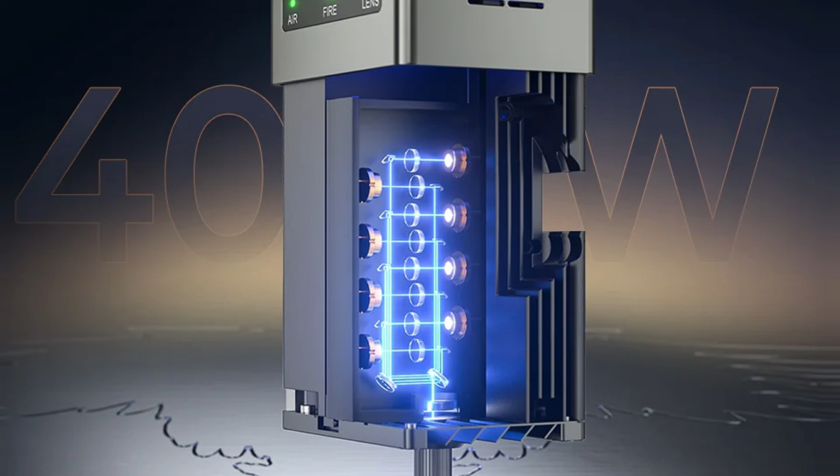I decided it was time to get a CNC laser to make parts, labels and containers for the machined microwave devices that my business sells. The new 40-watt class blue diode lasers were the final push I needed. Then, out of the blue, Creality asked if I'd like to try their rather fabulous Falcon 2.

Talk about serendipity. Right, let's be very clear here. I want a laser that, as a machine tool, does things better than the traditional tools I use. I don't want to run a laser business. There's plenty of other folks out there making amazing stuff.

I want to mark up control panels and cases for electronic and radio systems. I want to apply serial numbers and logos to tiny metal and plastic parts, build support structures to assist with machining and test fixtures, cut holes in engineering plastics that I can't do easily on a machine tool, and make protective wooden boxes for the high value items I sell.

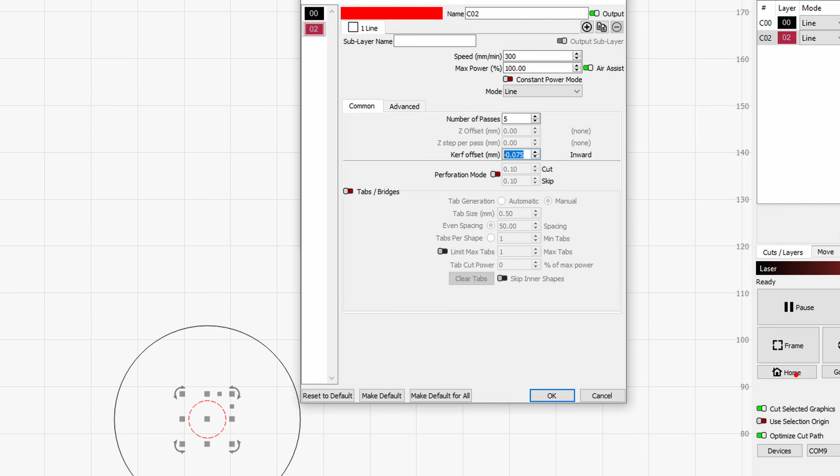The Falcon 2 is small enough to fit on a desk or workbench and light enough to carry in one hand, if you're strong. It can work standalone, but it integrates really well with Lightburn.

As well as the usual cutting and engraving, these blue lasers can develop reactive films on stainless steels to make a range of colours, including the blue that I use in my logo.

This thing combines 8 5.5 watt laser diodes into a single beam. I've managed to slice through some pretty thick boards with it, although using it on 2x4 is a bit silly when I've got a big radial arm saw.

For fine work, you can select a smaller beam that's great for fine engraving and where a cut needs to have minimal width. I'll measure just how fine a cut's possible later in this video.

For me though, making joints is where this laser really shines. I see what you did there.

Setting up the Falcon 2 is really simple. You just take it out of the box, fit the feet in one of the 3 sets of holes so it'll fit on different sized tables, slide on the head and connect the air assist tube to the pump that's supplied with the Falcon 2.

There's plenty of videos about our process, so I'm not going to repeat it here. I'm not going to show you how to make decorations or dog tags or wall art or engravings of your cat, even if it is a lion or a tiger or bear. Oh my. Obviously, I might allow the occasional Chihuahua coaster, but I promise faithfully that I'm not going to encroach on anyone's business by putting hilarious messages on stainless beakers or engraving imperial eagles on glass pool trophies.

I'm interested in how this gorgeous tool can help me make better products. I'm going to push things a bit with some materials way against best practice, but I like to know where the limits are. The most spiffy thing I want to try first is colour engraving on stainless steel. I'll try titanium alloys in a future video.

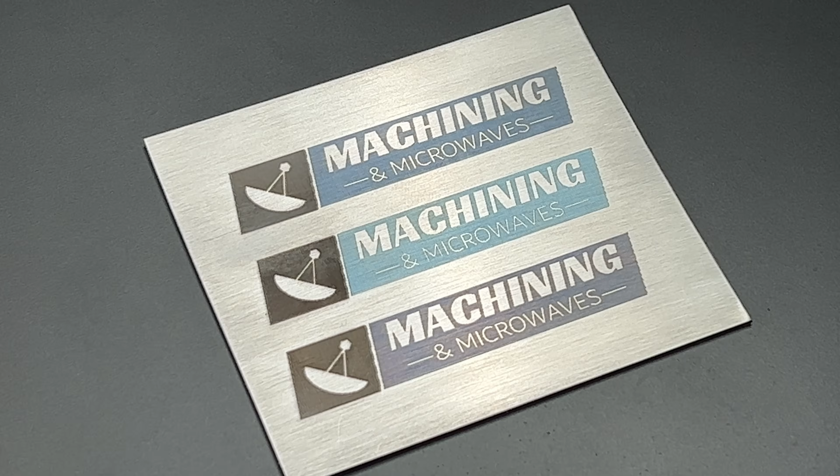This is my first attempt with a range of speeds and power levels generating black, 2 dark greys and 3 different blues. There's a lot wrong with it because I didn't use the right tools to make the source image and I've got no idea what I'm doing.

Not that that's ever held me back. It's almost my slogan. Under a microscope, there's some definite scan lines in the blues and the slant lines are terrible because they're a raster image instead of a vector. But from a distance, they look very nice.

I need to try different step over distances and some different dithering methods, but for a first attempt, I'm not going to beat myself up too much. I mean, Amy wouldn't be impressed. That's mildly acceptable if you screw your eyes up and look at it from far away. Ideally, from very far away.

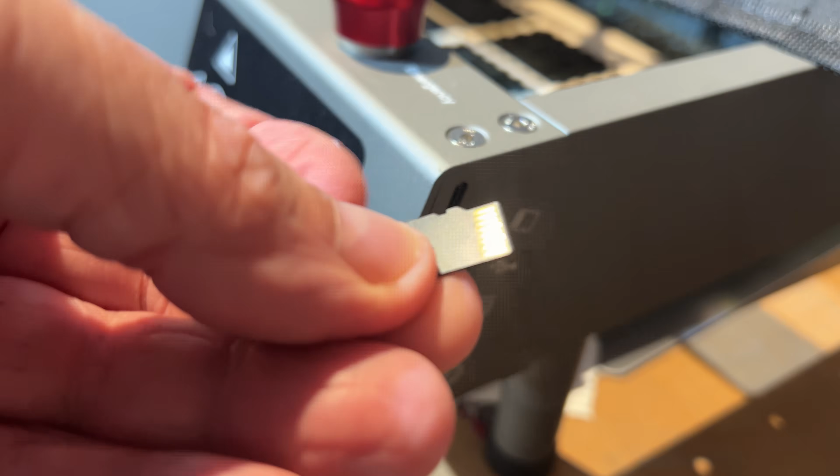So, what did I need to do to get the Creality machine to do its magic? You can simply unplug the microSD card from the Falcon 2 and copy a generated G-code file from a computer and then plug it back into the Creality. When you press the button, it finds the most recent file in the root folder of the card and prints that. I'm a nerd and I wanted to do things a little more technically.

So I decided to connect the Falcon 2 to the computer at the opposite end of the study. That's a problem because of the 3 metre limit of USB cables, but I found a 5 metre USB-A to USB-C lead with inbuilt range boosters. Links in the description. You can probably use 2 of these with a powered hub in the middle, but that needs additional nerding.

Wi-Fi connectivity would be neat, but might encourage folks to leave the laser unattended with the associated fire risks. The Falcon 2's got excellent protective systems to detect problems with the air assist, fire detection and lens fouling, but leaving a CNC laser running unattended without a room fire suppression system is a little outside of my risk appetite.

I wanted to site the laser near an opening window and well away from where I sit in the study, so I could have the Falcon 2 running with my back to it at least 4 metres away for eye protection and lung protection when I'm cutting smoky and smelly stuff.

It's important to say that the basic machine doesn't include some of the quite useful accessories I've got. The separately purchased honeycomb support plates are really useful for felt, leather and other floppy materials, and also when I'm using some sort of cutting template. For stiff material though, I prefer building support pillars with disc magnets for the material to rest on, and then another 2mm thick disc magnet on top to grip the workpiece.

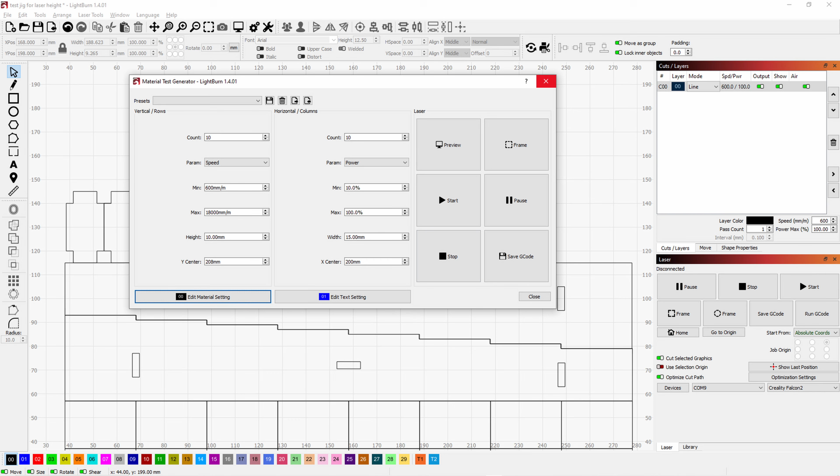One of the vital steps about using a laser for cutting or engraving is test grids. The speed and power of the beam need to be balanced so you can get a nice clean cut in a reasonable time. So I tried some cuts and fills at a range of speeds and powers. I'll be keeping them in a file for reference for each type of material. This one shows me how 3mm plywood behaves.

Based on the test grid, I chose 800mm per minute at 90% power as a reasonable value for cutting. I ran some 20mm square cuts and a 24mm round cut using zero kerf in the LightBurn settings to see how accurate the laser was in the X and Y directions when I wanted to make a cut with a very precise inside or outside dimension.

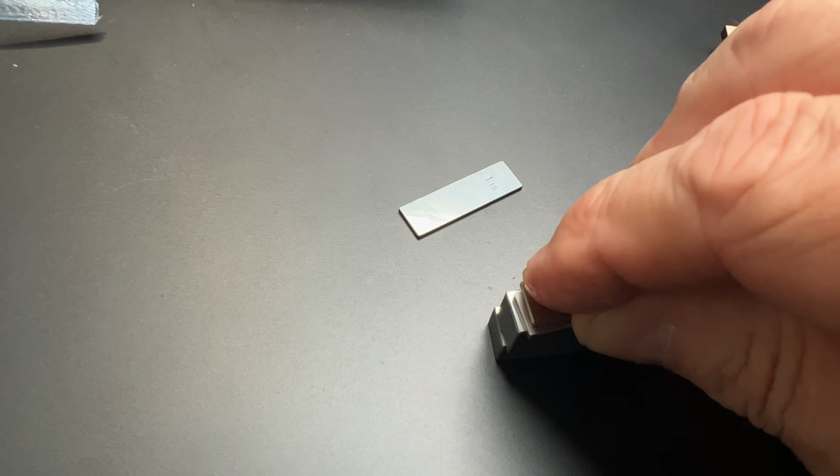I used a stack of gauge blocks to measure the X and Y dimensions of the square holes, and then used a 3-point bore micrometer to measure the 24mm round hole. I used the measured dimension so I could set the right kerf offset.

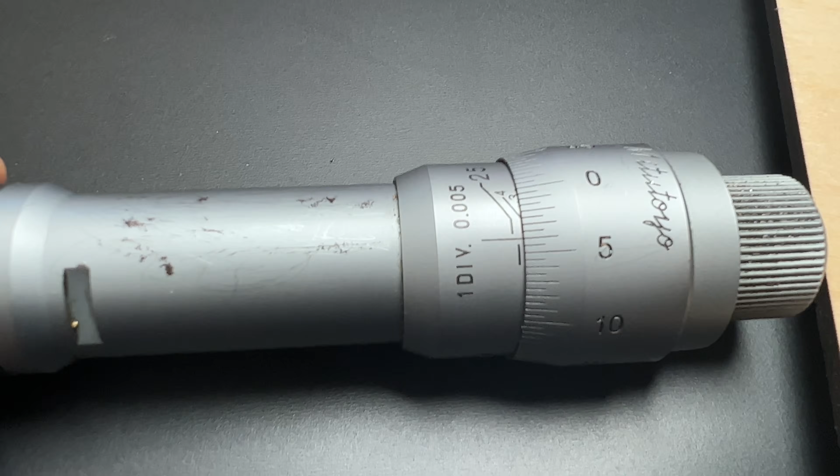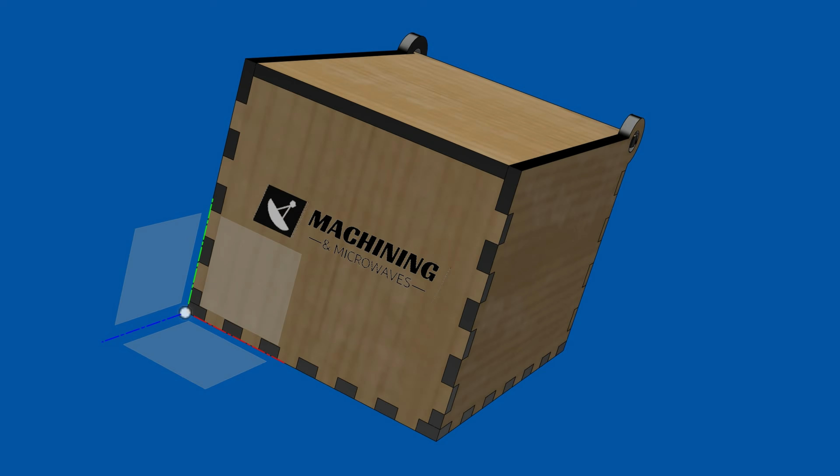Now that cutting was sorted, I decided to make a finger-jointed plywood box for some of the small antenna system products I make. I know there are fancy websites and Python scripts so you can just specify the size of box and the code does the rest, but I'm a nerd, so I made a parametric model in Fusion 360 that makes boxes in the style I prefer just by specifying the thickness of material, box dimensions and how many fingers per vertex in height, width and length.

It works fine, although I should really include the kerf compensation so LightBurn doesn't have to make any inside versus outside decisions, and I won't have to specify extra nodes with different kerf offsets for vertical and horizontal. After a tweak to the kerf offset, it goes together nicely.

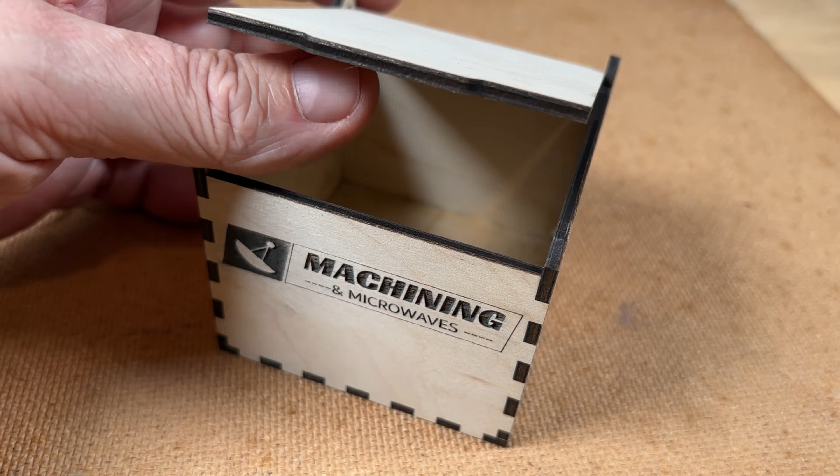The logo's nice and crisp and there's no smoke stains because I used painter's tape. I had to do a few tweaks to get the kerf offset just right, but now I can reproduce it no problem at all. I tried thicker plywood, but the glue in it wasn't really suitable and it set off the fire alarm in the Falcon 2.

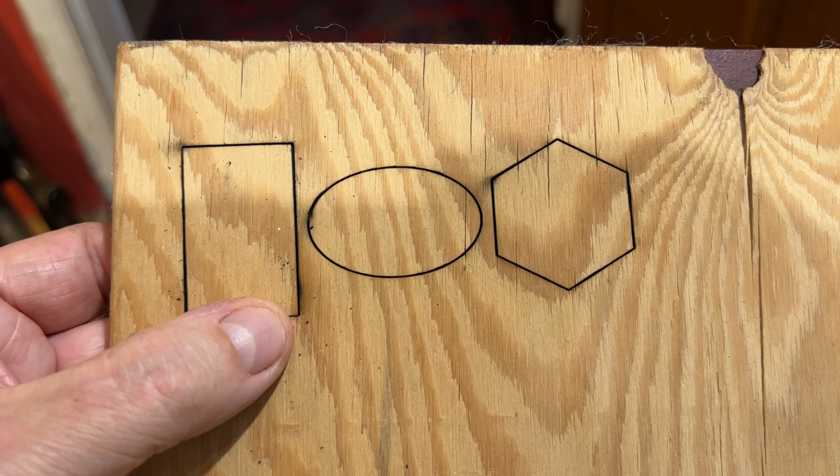Loads of smoke, and the air assist rather fanned the flames, but kept the smoke and heat well away from the laser head. After putting out the fire, I cleaned the lens and tried other plywood boards up to half an inch thick, and they cut nicely with no fuss.

I tried some spruce boards 17mm thick. They needed 2 passes, but cut very cleanly, and made some excellent well-fitting finger joints. I cut the slots 1mm too deep so I can sand off the excess burnt wood and leave nice clean faces, but actually I rather like that brown contrasty finish.

When I'm making pieces of radio equipment and test gear, I like to have a nice neat front panel.

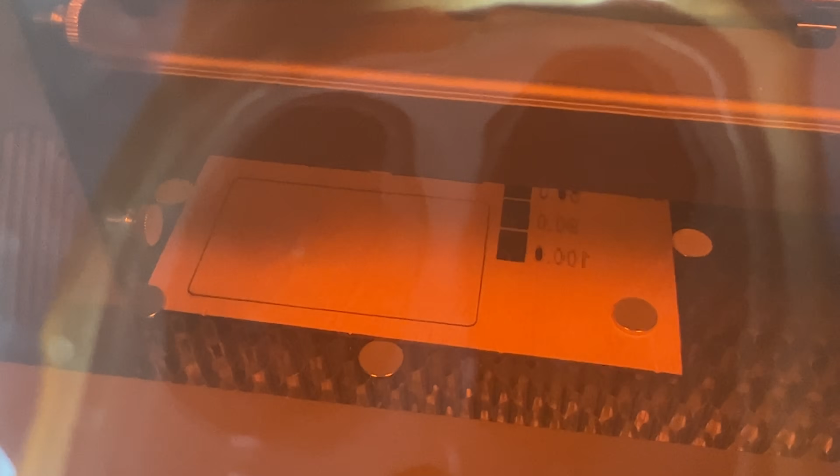Getting that really crisp result in the past was awful. Anyone remember Letraset and water slide transfers? Best forgotten. Now I can machine a piece of dyed anodised aluminium to size, cut out a support template exactly that size in thin plywood, then hit the anodised material with a laser. The dye in the anodised layer either bleaches, dissociates or sublimates, leaving a nice white line or block.

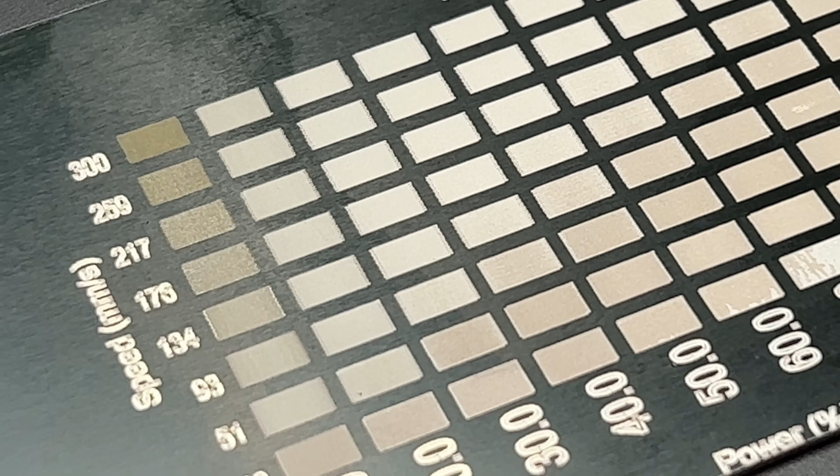If you use too much power or too slow a speed, it goes silver, perhaps exposing the raw aluminium. I ran test grids to find the best white and then used those settings to make a quick sample in Lightburn. I got a bit overconfident at this point and decided to try some 150 micrometre stainless foil.

That's 0.15mm or 6 thou or mil, bit thicker than a sheet of printer paper. I tried a simple straight cut, but foolishly I placed the material on the honeycomb bed. I should have clamped it in a fixture.

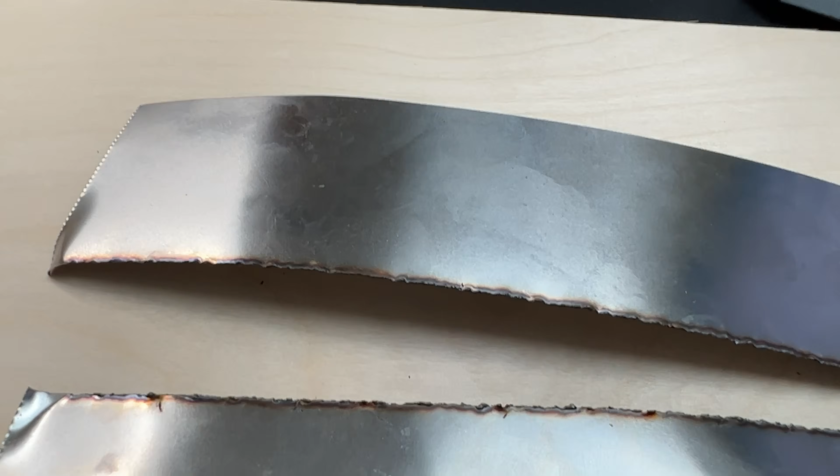The cut welded itself to the honeycomb in a couple of places, making the edge a bit raggier than it should have been. An 18mm hole cut through okay as well, but I think I need to try some better fixturing and play more with air assist level and speed and power.

I tried a test grid for cuts and it was pretty disastrous because the material warped and twisted and bent and soon hit the laser head and got pushed out of the way. I'll try more experiments in a future video.

Only slightly defeated, I tried cutting some copper foil, which should be impossible, but I used 10 micrometre foil and put low-tack painter's tape on the upper face, laying it all on a sheet of plywood. The laser cut it very easily, but there was some rippling around the edges of the holes.

I might try it fixed between 2 sheets of clear glass with paper on top of the foil. I think the best way to cut thicker copper foil might be to paint the copper with an etch-resist varnish, laser it both sides using alignment pins, with the rear image being inverted, then perhaps electro etch or use a chemical etch to remove the bare copper from both sides until it's all gone, and then finally dissolve the resist in acetone or DCM or limonene or something.

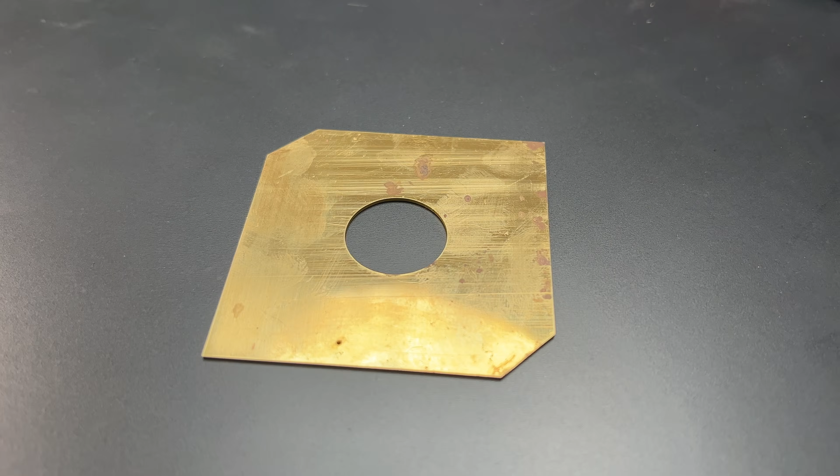The next material's brass. Just for giggles I tried a full power etch, but it just left a rather blurry and very shallow mark as expected.

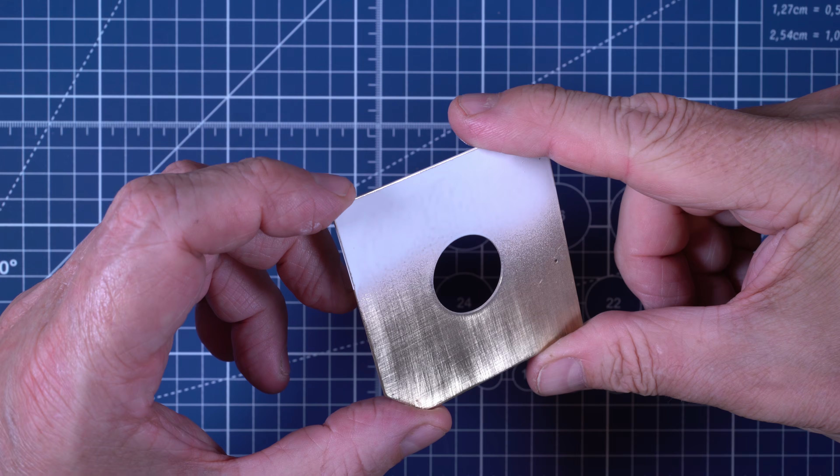Then I tried some brilliant spray on the brass. It goes on as a very fragile white powder layer once it's dried, but once you hit it with the laser it turns a very dark shade of brown, close to black, and it adheres ever so strongly to the brass surface. It's very robust and the contrast's excellent.

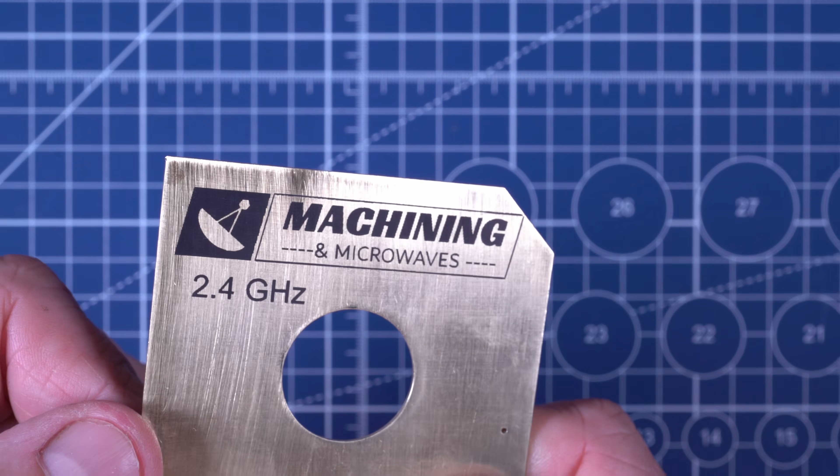I love this little unit. It's reliable and convenient and fast and tidy. Let's see how it deals with plastics.

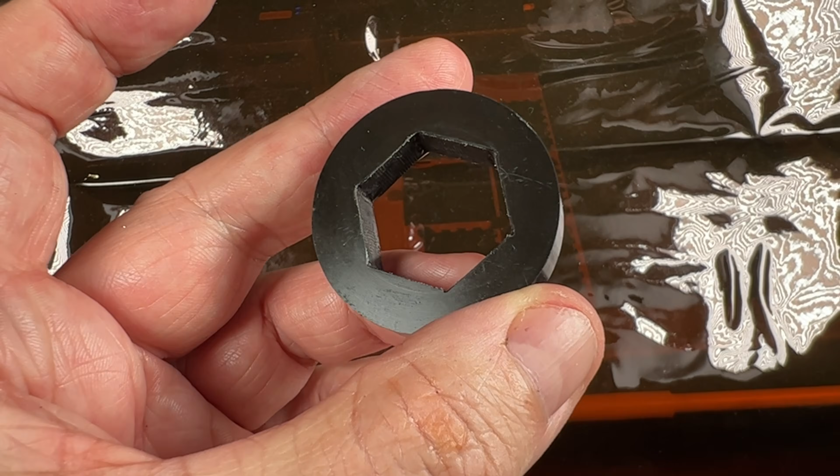It's supposed to be able to cut breathtaking thicknesses of acrylic, but the colour really matters. I tried some cuts in black acrylic from a Chinese source and some thicker material that's branded as Perspex. Again, it's black. They both cut well with a slight amount of banding on the edges.

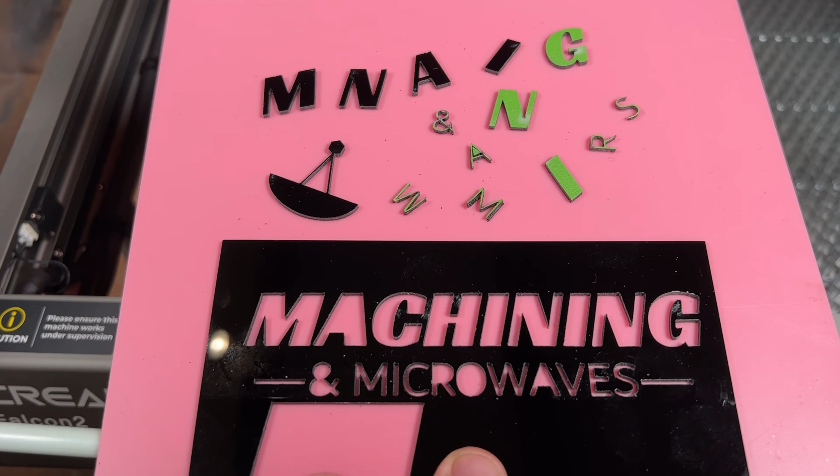I tried cutting out my logo and it handled that well. I adjusted the kerf width to 0.1mm on the outside to try and get the letters precise. Certainly seems to work well on the black material.

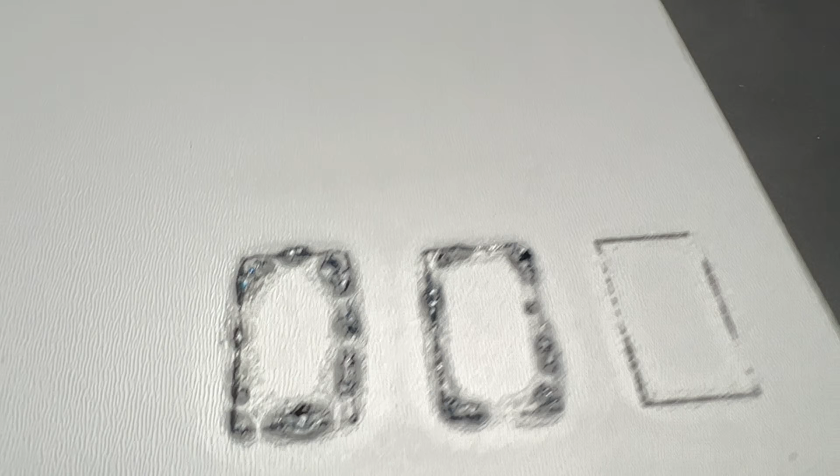I went for broke and tried some dark blue acrylic, which definitely should not work. And that confirmed it - it really isn't working properly. I tried some awful white acrylic with a test grid. That was a major fail. Best consigned to the trash can of history.

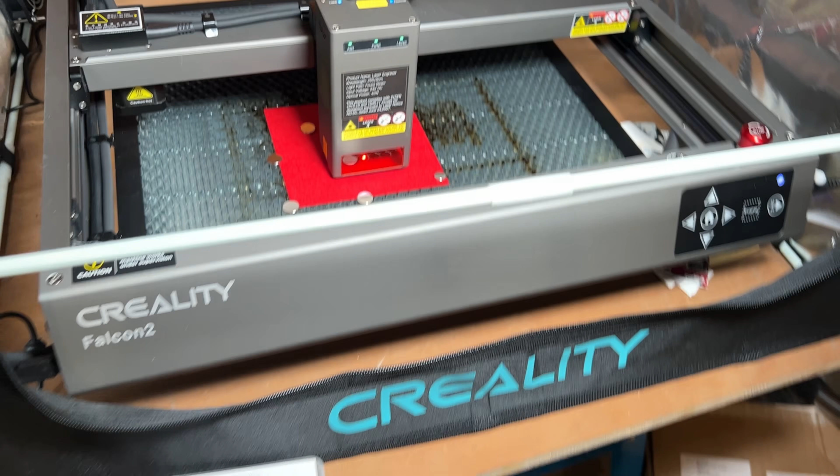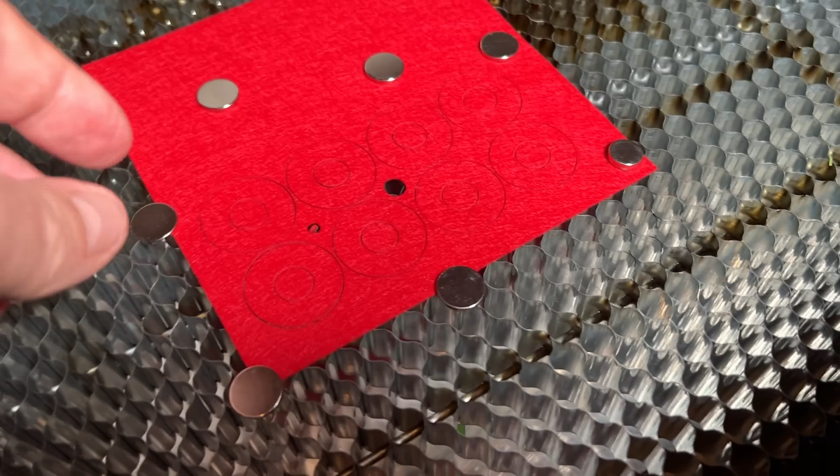Another thing I can't make easily but really need is felt washers to fit under bolt heads and steel washers holding plastic sheet materials and other brittle things. In the kit there's some lovely bright red felt-like material, so I made some washers from it. The material seems to be some sort of man-made fibre and the edges have sealed nicely.

I do have some real wool industrial felt used for way wipers that I'd like to try. Perhaps that's something for a future video.

For masking large areas, I find it best to use a foot-wide roll of masking material and use a rubber roller or squeegee and burnisher to get a good contact with the material. I use Gorilla brand duct tape to help peel off the mask after a cut. That stuff's really sticky and helps lift the little fiddly bits of tape.

I also use some electronic tweezers and a surgical scalpel for really fine work under a magnifier or a binocular microscope. The plastic razor blades that come with a holder also work well, links in the description of course.

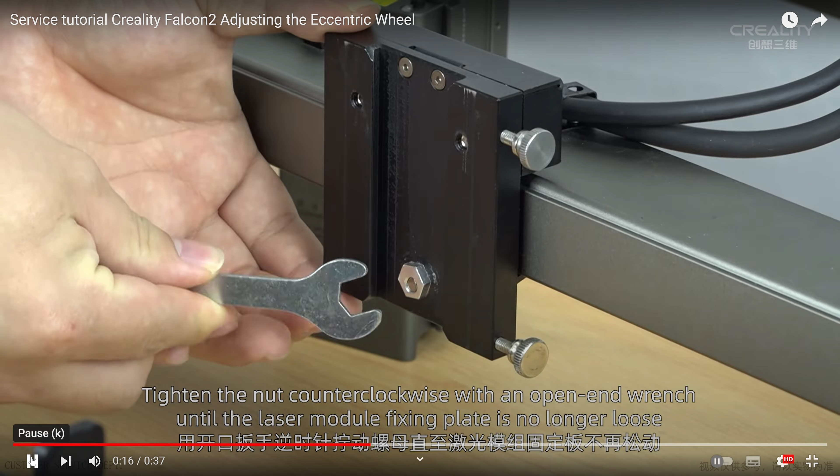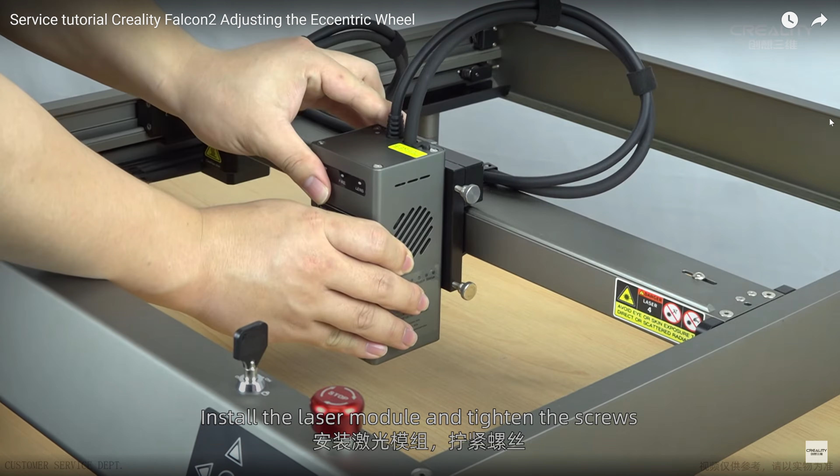It makes sense to check the alignment of the machine when you get it, but perhaps not to the extent I did. Mine was pretty much perfect out the box, but making adjustments is easy enough using an engineer's square. There's good instructions on Creality's channel about setting belt tension and ensuring the gantry is perfectly aligned. I'm going to check belt tensions and the eccentric rollers once a month to make sure everything's still hunky-dory.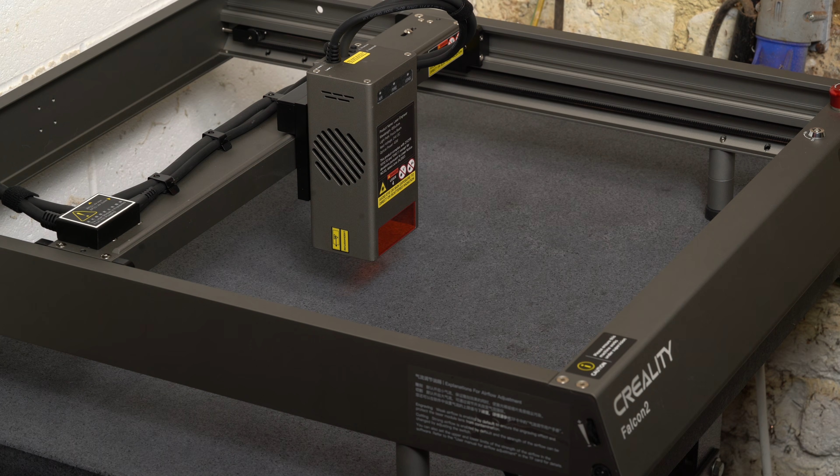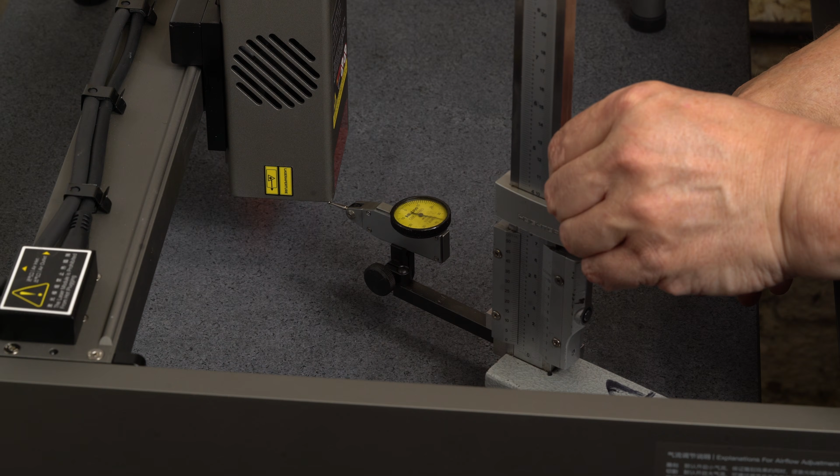I set up the Falcon 2 on my granite surface table, which is flat and level to within around 10 micrometres, and used a surface gauge and dial test indicator to check the distance from the reference plate to the corner of the laser head across the full range of motion. With all 4 feet finger tight, there was about 40 micrometres of error across the full x-axis range and 200 micrometres across the y-axis. By adjusting the feet and using a machinist level and a 2 micrometre DTI, I nulled out the errors to better than 20 micrometres.

Very impressive indeed. In a future video, I'll set up a dial test indicator to find how close to true straight lines and circles the Falcon 2 can manage.

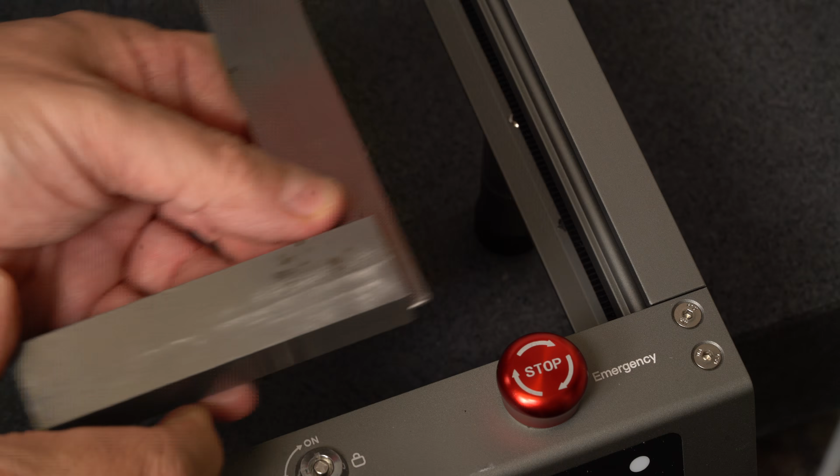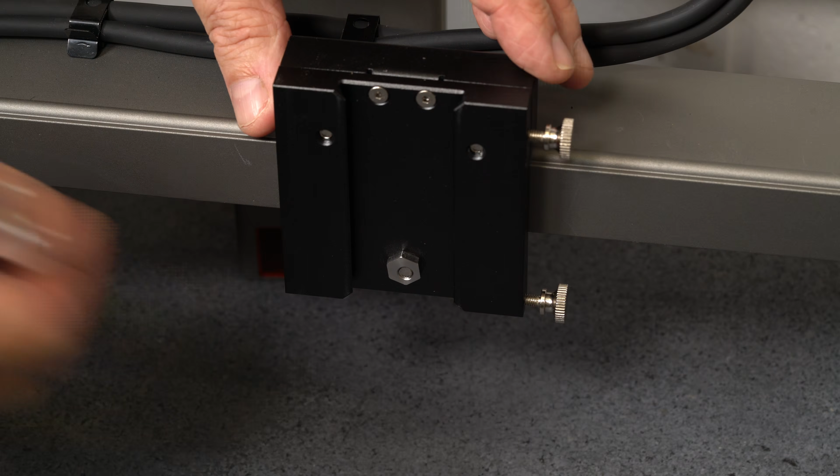That should be interesting. After checking for squareness, I found the sides are symmetrically bowed inwards by about 500 micrometres, but it didn't affect the precision of the traverse on either axis. The bowing was symmetrical and effectively cancelled out any errors. I decided to adjust the eccentric nuts on the laser head and on the y-axis slides, although actually they were pretty close to optimal straight out the box. Belt tension was also perfect, so I didn't mess with it.

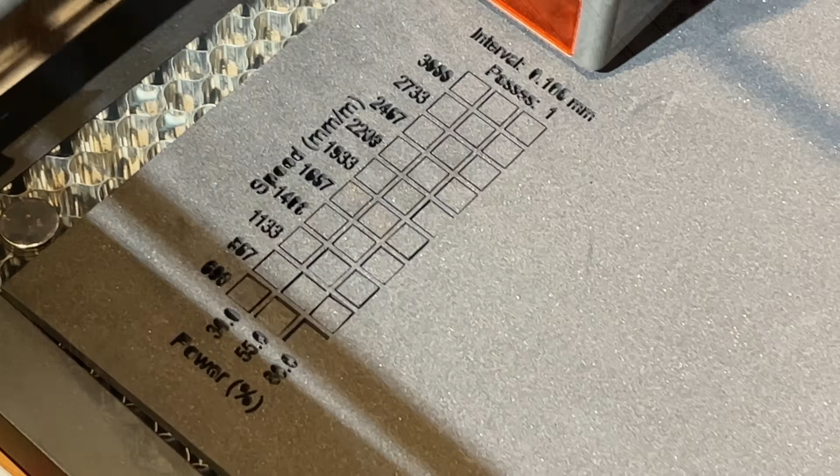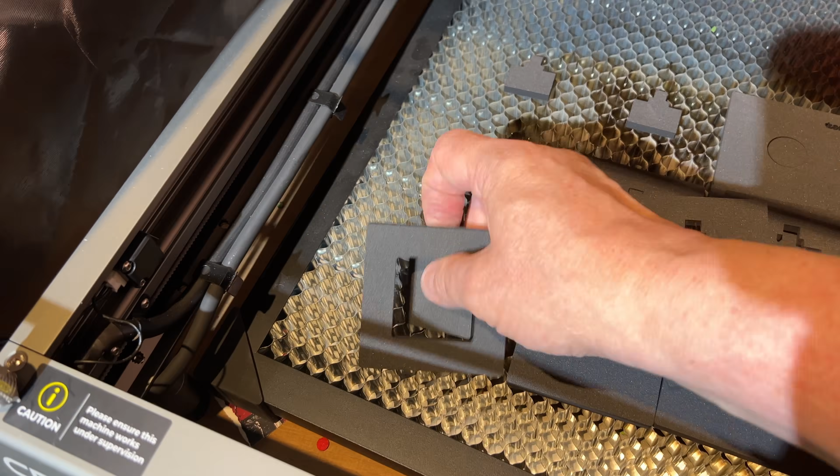To finish the small finger jointed box, I made a liner from dark grey EVA foam, cutting a test grid using the precise setting of the laser. The cut lines were very clean and straight with no ridges or melting. I glued the slices together to make a 3D cushion for an SMA to WR90 waveguide transition. My first attempt, and it just worked.

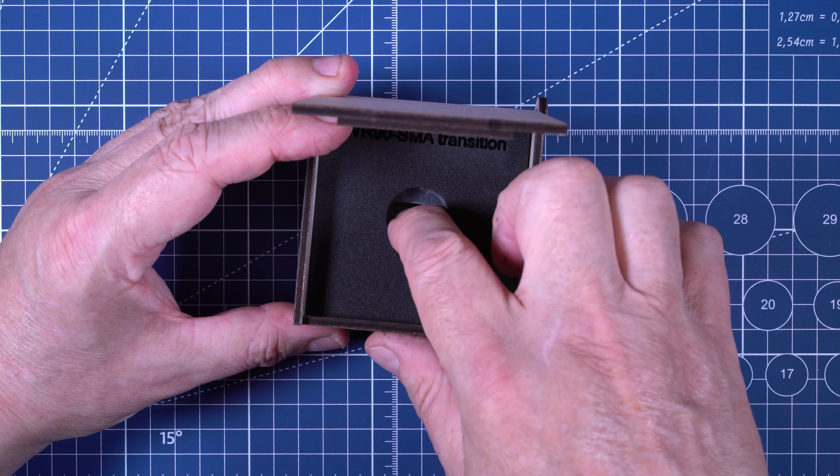I'm confident in the performance and reliability of the Falcon 2. It feels like a finished and complete product, not a flaky development project that's going to need care and feeding and getting involved in geeky stuff. I can just use the thing like I use a hammer or a chisel or a milling machine. Very cool.

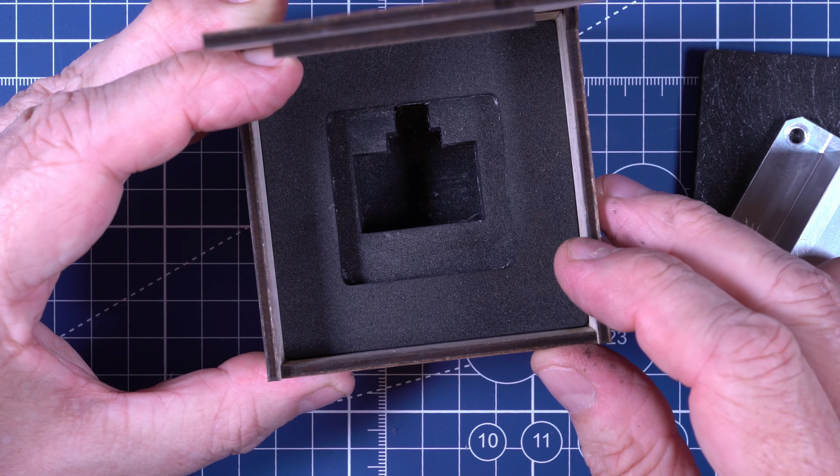And finished off with engraved text and a QR code engraved on the lid as the cherry on the cake.

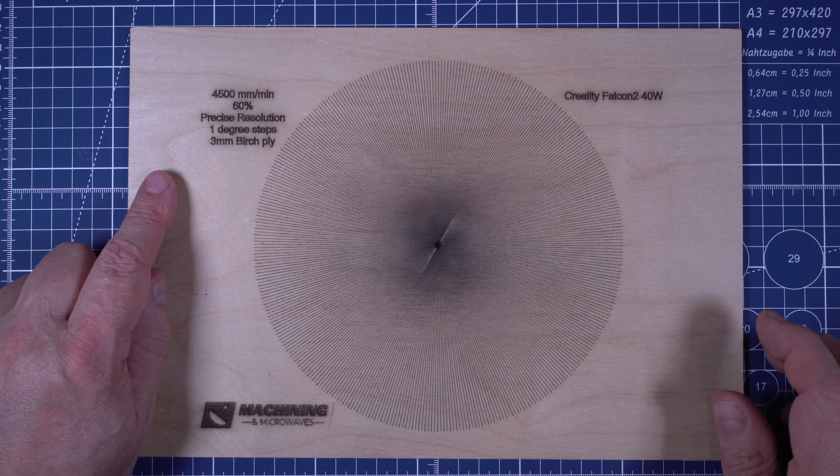I wanted to check if there were any artifacts or weirdnesses with tiny increments of parallel and radial lines, so I ran some torture tests to see if anything showed up. There's a faint suspicion of pairing of radial lines where a stroke goes from one side of the circle to the other, moves around the circumference by 1 degree, and then goes back to the opposite side of the circle. It's hard to be sure, but there's some very, very minor effect going on.

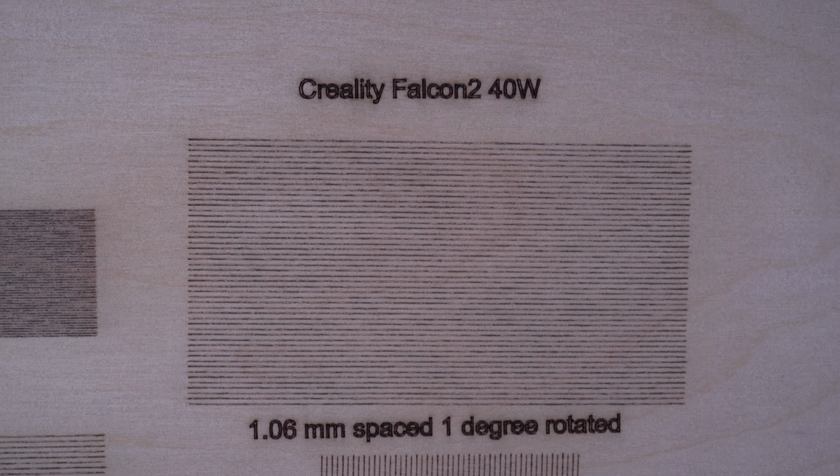It could be an optical illusion caused by the very real effect that when the laser head's accelerating, it starts at low power until it's up at full speed, then it slows down again and cuts the power towards the destination. But it maybe doesn't do a deliberate overshoot, so there's a very sharp cut-off and you get a dark ending to the line. Alternate lines appear shorter and lighter as a result. It's being super picky, and you get the same effect when doing an area fill.

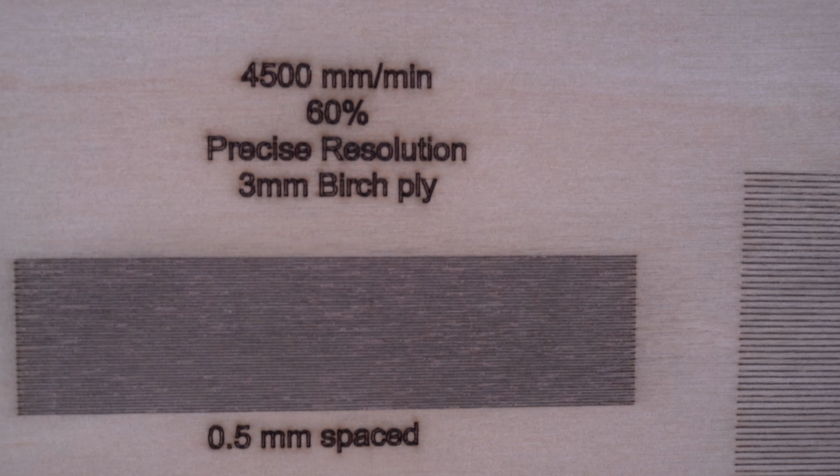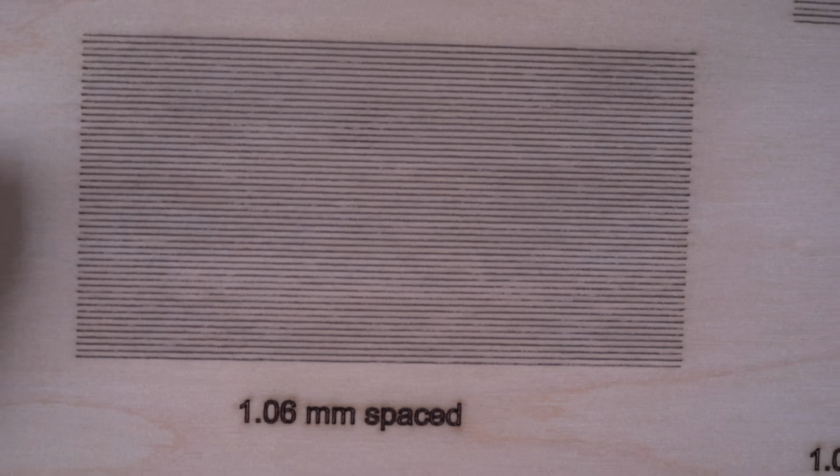There though, you do have the option of unidirectional fills to help avoid the comb-like appearance of rectangular fills. I might try coding up some programs to generate G-code that avoids the issue using deliberate overscans, but I rate this as a highly successful response, and for a machine that's designed for speed, it's a very good compromise. Excellent.

One of the key features of the Falcon 2 40 watts is the maximum top speed of 25,000 millimetres a minute.

I'm an engineer and I work on the trust but verify model, so I set up some test patterns moving at speeds of up to 25,000 millimetres a minute according to LightBurn, with only x-axis movement, and then separate tests with circles, diagonal lines and a y-axis traverse. I used a stopwatch on a smartphone to give me an independent source of elapsed time.

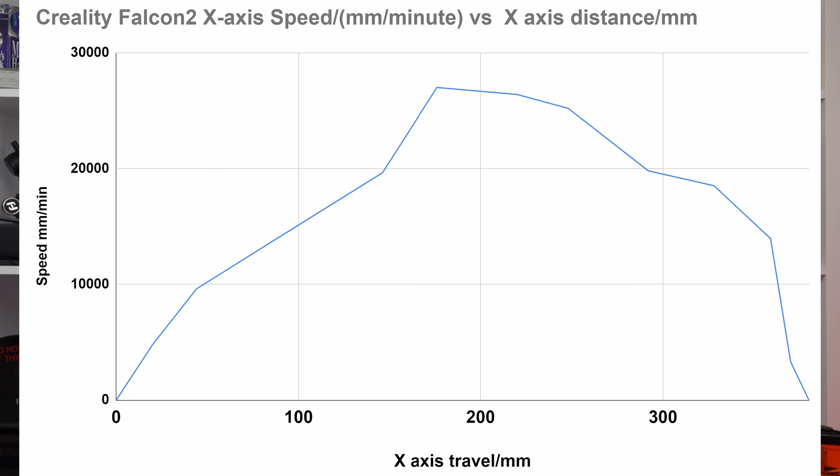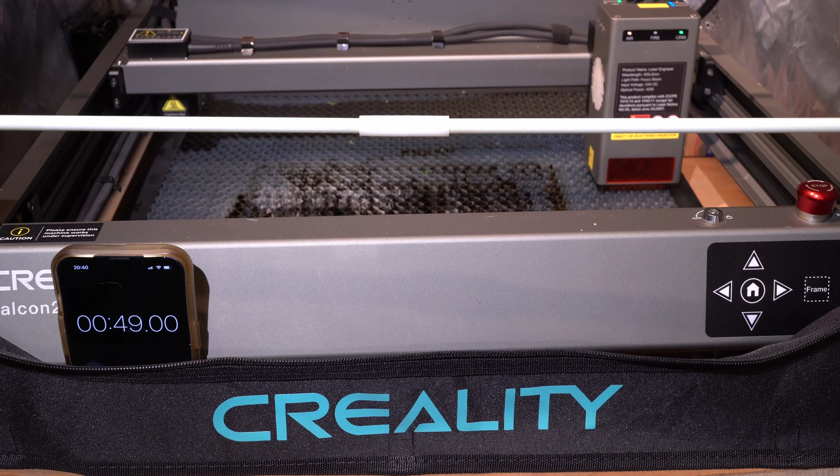On a long x-axis traverse, the speed really does exceed 25,000 millimetres a minute once the laser head's been accelerated, which takes nearly half of the traverse, but then obviously it's got to slow down again. So the mean overall speed from a standing start to a full stop is around about 13,000 millimetres a minute.

There's a lot more mass in the Y direction, obviously, because you've got to move the whole carriage. The average speed for the same 380mm stroke is 7,400 millimetres a minute. Circles with a diameter of 380mm average about 11,500 millimetres a minute, as do diagonal lines of length root 2 times 380, just as you'd expect.

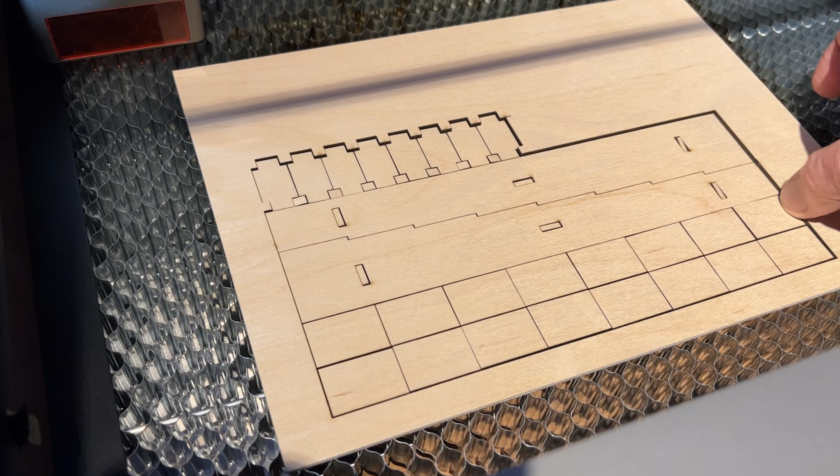I did detailed tests on the cut width at various heights above the workpiece to find the divergence of the laser beam and check the kerf width at normal and precise resolution. I used a stepped fixture with small test coupons cut from 3mm plywood, and then did a detailed analysis of the real size of rectangles in both planes in standard and precise settings for a range of kerf offsets to find the optimum for my material, which is this 3mm ply.

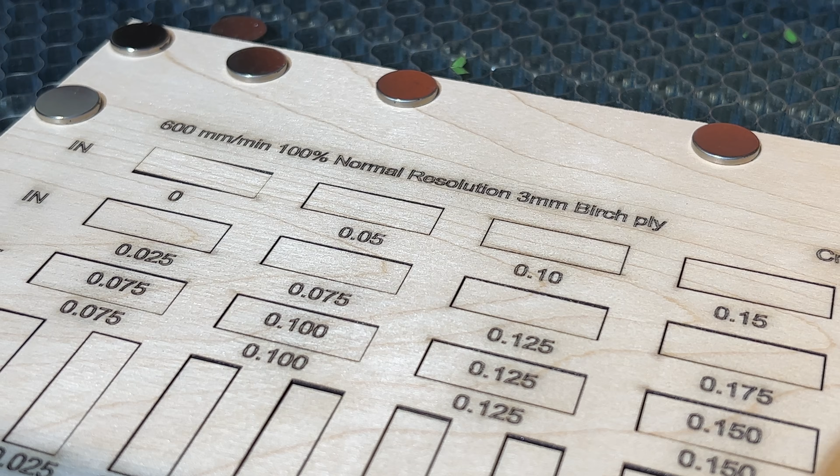Life is too short to go into that now, but spoiler alert, a kerf offset of 0.1mm in standard and 0.075 in precise gave the best results in this specific 3mm ply at the specific settings I used. I'll probably go into these findings in a lot more detail in the next video in the series.

As for safety, yes, there are serious risks of eye injury and permanent blindness on any visible light laser if you get even a momentary flash from a reflection. Unlike the long-wave infrared from a CO2 laser, your eye is designed to be super efficient with visible light, and your retinas get no natural protection.

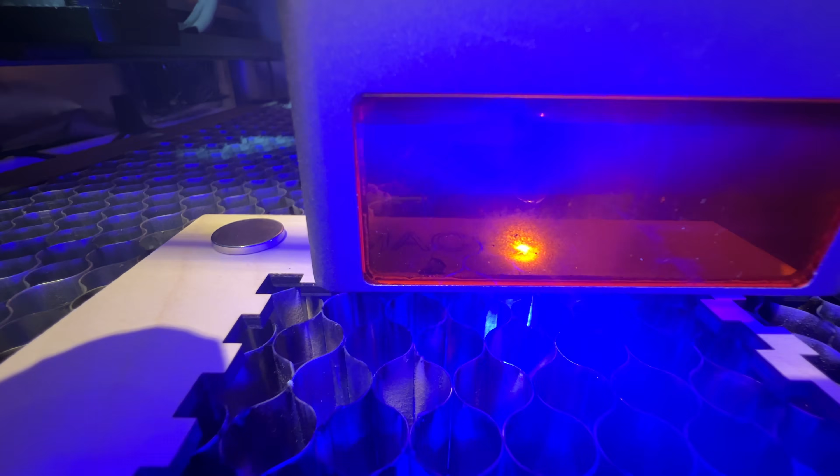The filtered cover on the bottom of the laser head certainly helps, and in conjunction with the safety goggles and simple practical steps like staying the heck away from the machine while it's running, it's going to be safe enough so long as you keep humans and animals out of the area completely and lock the machine if you have kids or idiots in the house.

Back in the 70s, I somehow had a laser burn on one of my retinas. It wasn't spotted until I went for a computer eye test in the 1980s. 'Ooh,' the ophthalmologist said, 'Where do you get the cool laser burn?' 'What laser burn?' I said.

I used some strong UV sources in experiments, and I bought some horribly expensive professional goggles with an OD7 rating for UV through right to the end of blue, so I used those. I haven't measured the performance of the goggles in the kit, but please use them.

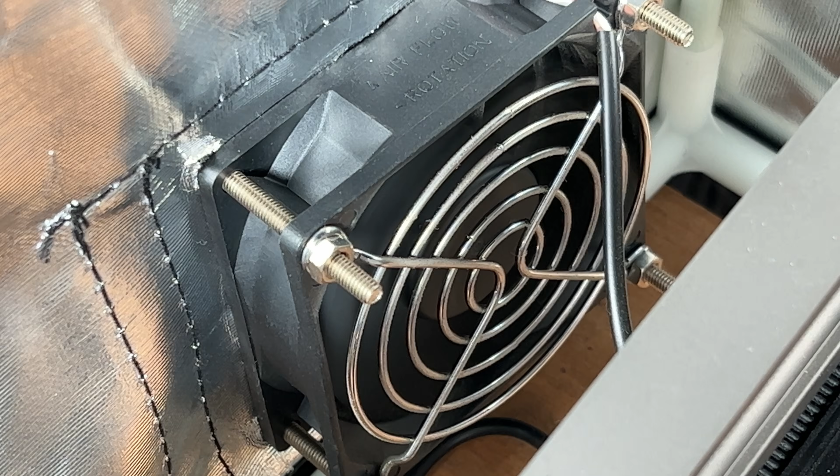The cover's a low-cost addition that really helps control smoke and fumes. The supplied fan's pretty quiet, but it's also not very powerful. I'd consider using two much chunkier fans and using the minimum length of hose stretched to ensure good airflow.

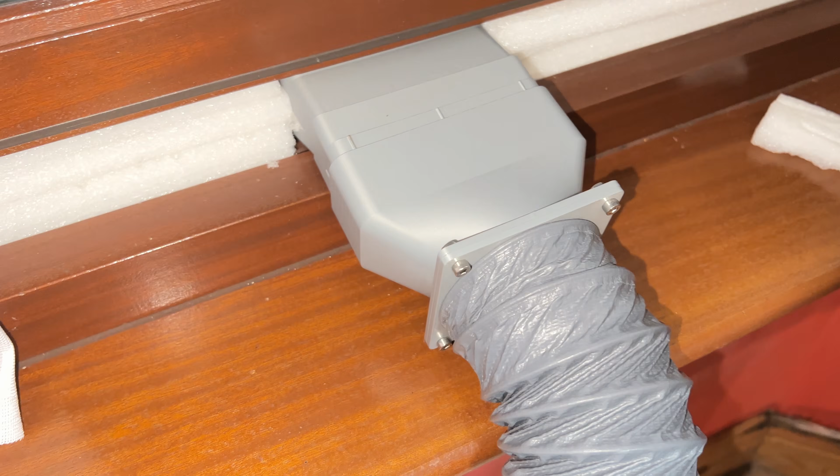Don't just poke the hose out of a window. The fumes will probably just come straight back into the room. I cut some foam blocks to help seal the gap in my window and fit around the 3D printed adapter. The result's almost no stinkiness and very little smoke leakage back into the room.

Overall, I just love this little machine. It's so much more adaptable and portable and convenient than a big CO2 laser. I like the repeatability, I like the precision, and I like the switchable laser head setting for fine detail work or full power with a wider kerf.

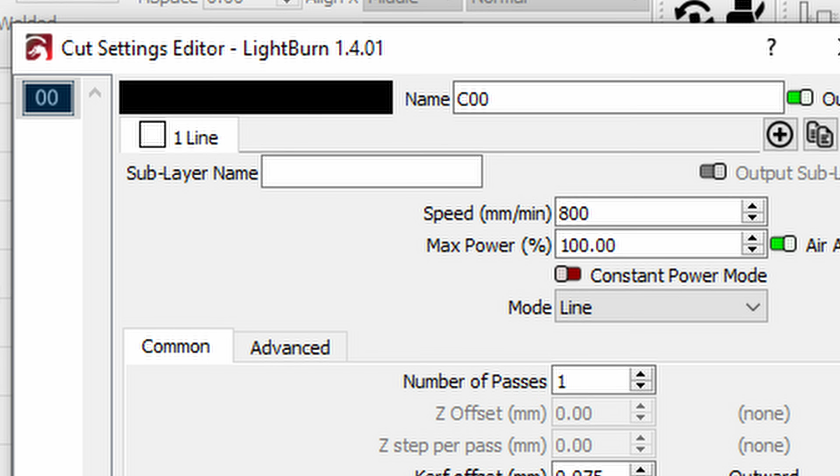I like the way it works straight out the box with LightBurn, as long as you read the instructions and copy the settings from the SD card to the computer like the folks on the forum seem to fail to do.